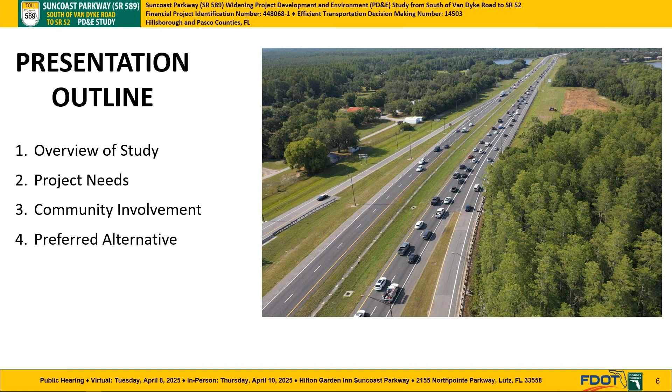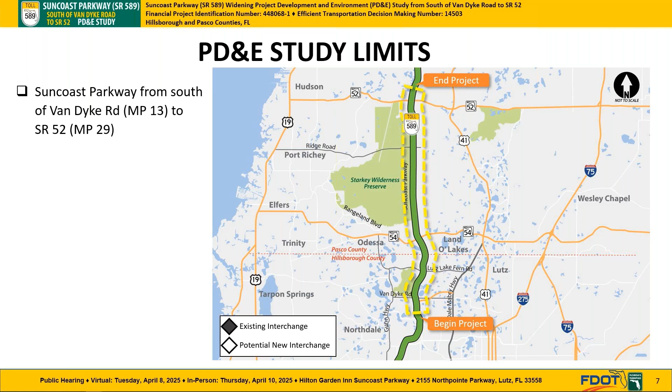The remainder of this presentation will provide an overview of the study, project needs, and our community involvement efforts. We will then review the preferred alternative and potential environmental effects, both beneficial and adverse. The study limits extend along the Suncoast Parkway from south of Van Dyke Road at milepost 13 to State Road 52 at milepost 29. The project is located within both Hillsborough and Pasco counties. There are 5 existing interchanges within the study limits. Pasco County is currently evaluating extending Rangeland Boulevard across the Suncoast Parkway. This PD&E study also includes evaluating one potential new interchange at Rangeland Boulevard, as requested by Pasco County.

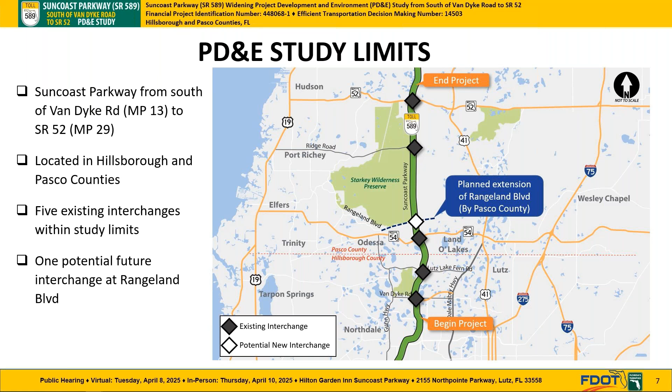The purpose and need for a project provides a basis for developing, considering, evaluating, and eliminating project alternatives. The project purpose and need are to accommodate year 2050 travel demands, enhance safety, improve travel time reliability, and enhance emergency response and evacuation.

In 2000, the population within Hillsborough and Pasco counties was just over 1 million people, and it more than doubled by 2023. The population within the 2 counties is forecasted to be over 2.8 million people by the year 2050. With the project located within a rapidly growing region, travel demands on the Suncoast Parkway are expected to increase by 70%. If nothing is done, the existing roadways in the study area would not be able to accommodate the expected increase in traffic.

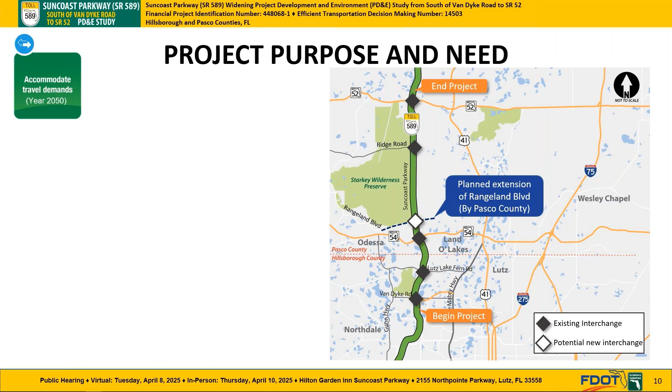Improvements to the Suncoast Parkway are needed to accommodate year 2050 travel demands. In order to accommodate this demand, 6 lanes are needed now from south of Van Dyke Road to north of State Road 54, and 8 lanes will be needed by 2040. From north of State Road 54 to Ridge Road, 6 lanes will be needed by 2030. From Ridge Road to State Road 52, 6 lanes will be needed by 2035.

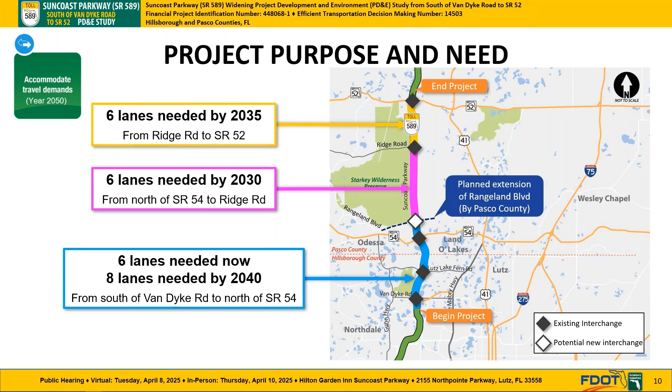Improvements to the Suncoast Parkway are needed to enhance safety. Between 2018 and 2022, there were approximately 1,045 crashes within the study limits, equating to an economic cost of $145 million. If nothing is done, increased congestion will lead to an increase in crashes.

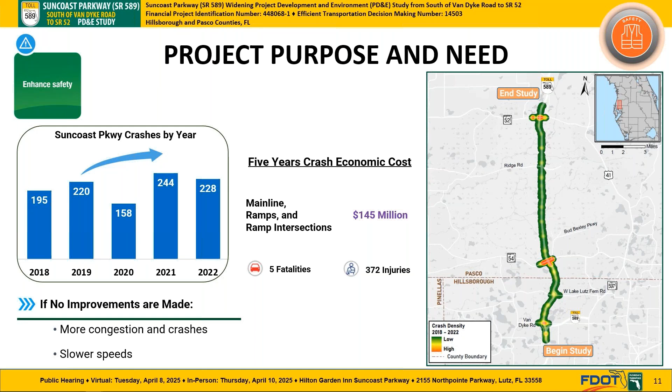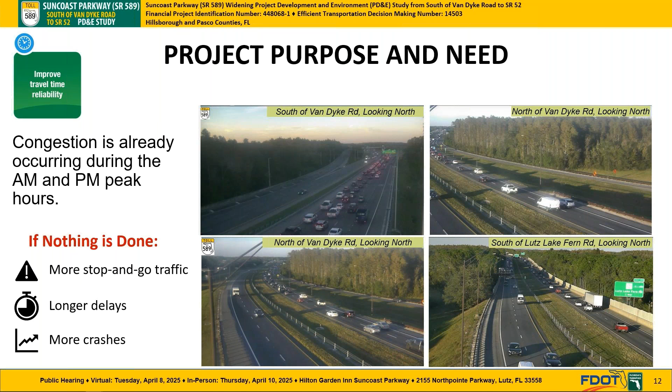Improvements to the Suncoast Parkway are needed to improve travel time reliability. Currently, there is congestion during the morning and afternoon rush hours along the Suncoast Parkway and at the State Road 54 interchange. The proposed improvements are expected to reduce travel times during peak periods. Finally, improvements are also needed to efficiently process large volumes of traffic during emergency evacuation events.

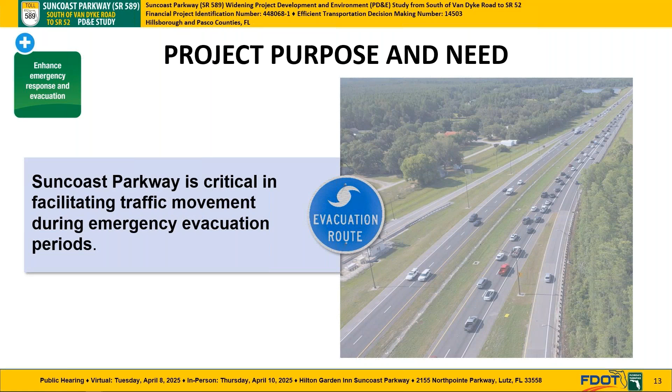Serving communities is at the center of everything the Florida Department of Transportation does. During the development of this project, the enterprise has engaged adjacent communities and stakeholders in the project's decision-making process. In February of 2024, over 2,400 newsletters announcing the start of the study were distributed to residents, property owners, and interested parties. An alternatives public information meeting was then held in June of 2024, where project alternatives were presented. Approximately 100 people attended the alternatives public information meeting, and over 40 written comments were provided to the project team.

Community feedback is at the core of all we do. The Florida Department of Transportation works with the public to balance their community vision with the community's transportation needs. This is routine on all of our projects to ensure Florida's infrastructure is safe, resilient, and efficient for many years into the future. This includes coordination with local governments and agencies to receive input that was incorporated into the preferred project alternative.

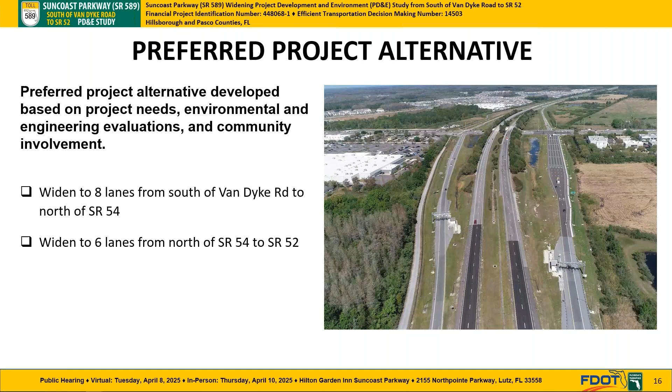A preferred project alternative has been developed based on the project needs, environmental and engineering evaluations, and community involvement. The preferred project alternative would widen the Suncoast Parkway to 8 lanes from south of Van Dyke Road to north of State Road 54, widen the Suncoast Parkway to 6 lanes from north of State Road 54 to State Road 52, improve existing interchanges, and accommodate a future interchange at Rangeland Boulevard.

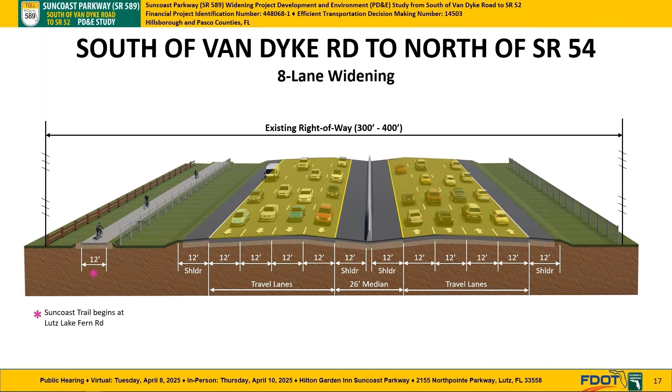From south of Van Dyke Road to north of State Road 54, widening to the inside and outside is proposed to include 4 12-foot wide travel lanes in each direction, separated by a 26-foot wide median with a barrier wall. From north of State Road 54 to State Road 52, widening to the inside is proposed to provide 3 12-foot wide travel lanes in each direction, separated by a 40-foot wide median.

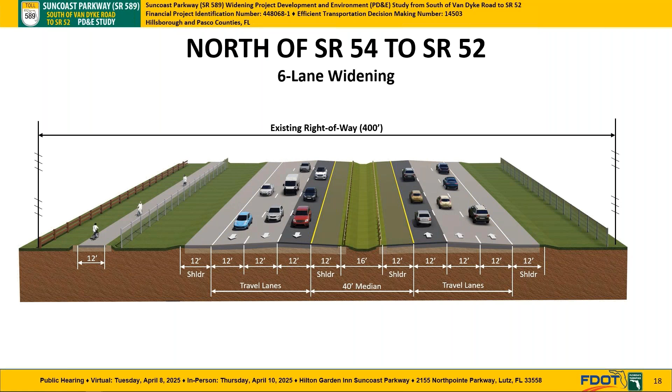Now we will cover the details of the preferred alternative related to the 5 existing interchange locations. After, we will discuss the ongoing planning efforts around a potential new interchange at the future Rangeland Boulevard.

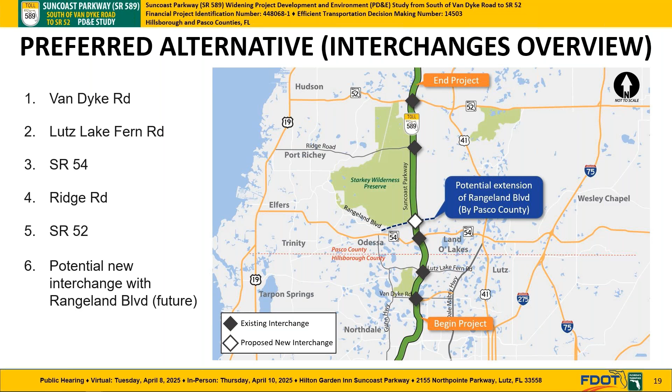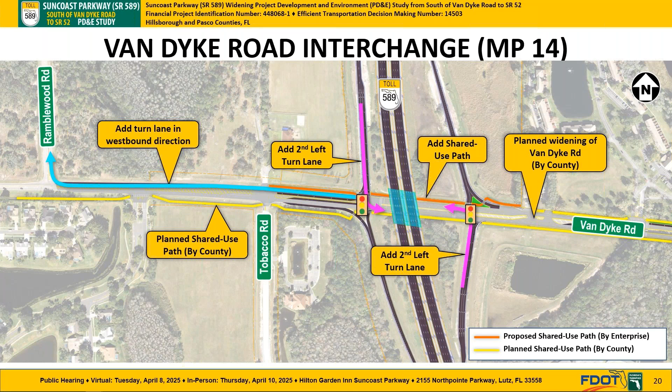At the Lutz Lake Fern Road interchange, the preferred alternative consists of minor modifications that includes adding additional turn lanes and extending turn lanes at the intersections. In addition, a shared use path is proposed within the interchange area on both sides of Lutz Lake Fern Road.

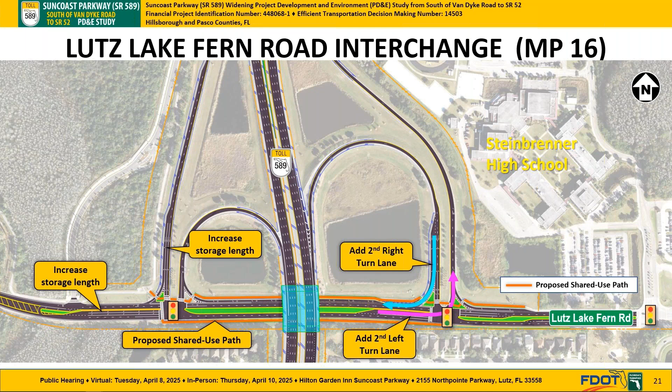At the State Road 54 interchange, the preferred alternative includes adding an additional right turn lane to the northbound off-ramp, an additional right and left turn lane to the southbound off-ramp, and an additional left turn lane from westbound State Road 54 to the southbound on-ramp. Along State Road 54 itself, an additional through lane would be added in the westbound direction beginning at the southbound off-ramp, continuing past Crossings Boulevard and up to South Branch Boulevard. Improvements would also include a shared use path on both sides within the interchange area.

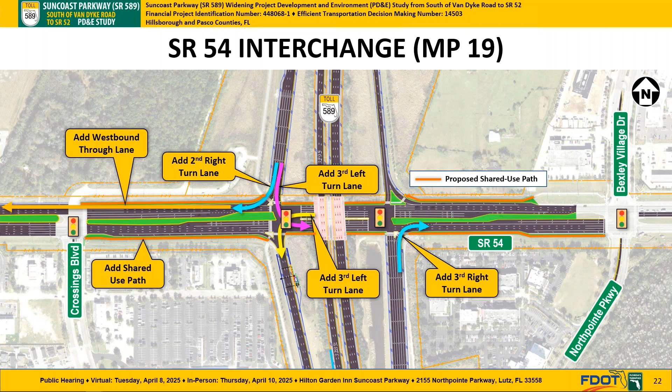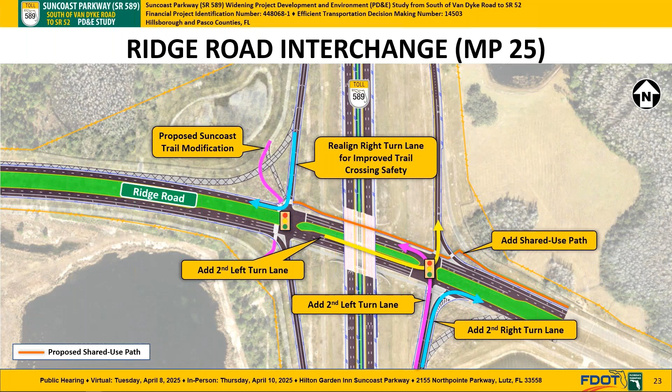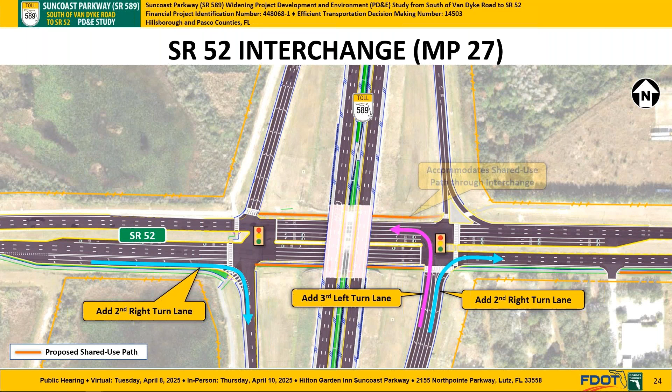We will now discuss the ongoing planning and development of a potential new interchange with the future extension of Rangeland Boulevard. When considering any new interchange connection, Florida's Turnpike Enterprise adheres to the following criteria.

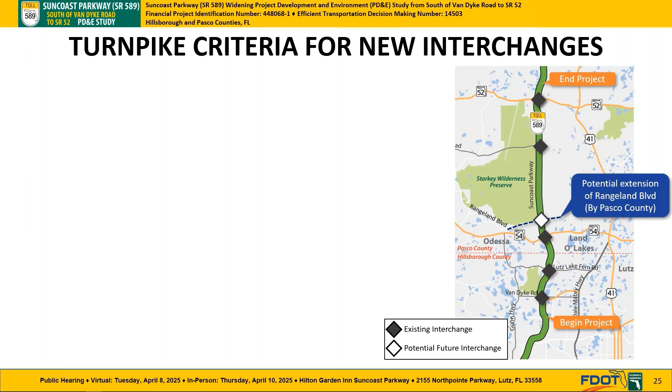A new interchange must connect to a public roadway and serve all movements. The interchange must meet safety and operational requirements. The interchange must be supported by the local community. We place a high priority on projects that are welcomed within the communities we serve. And finally, the interchange must be consistent with local government plans and priorities.

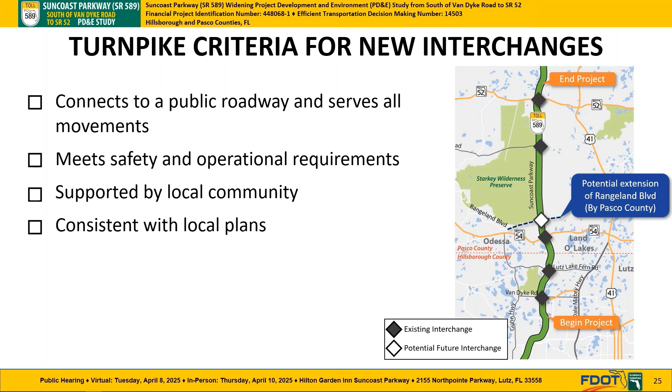The preferred alternative includes adding a new interchange at Rangeland Boulevard. However, a new interchange would not be constructed until all criteria are met and funding has been identified. We will now review the interchange concept developed for Rangeland Boulevard.

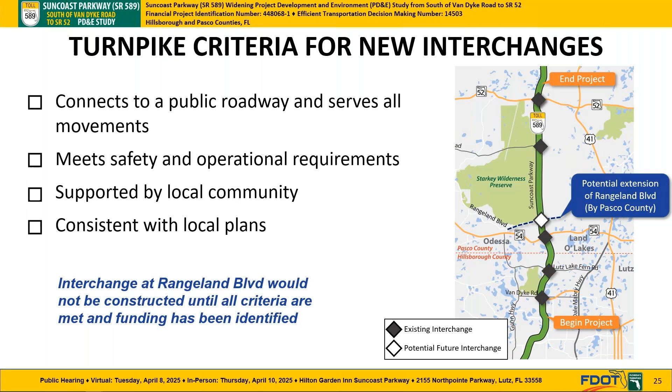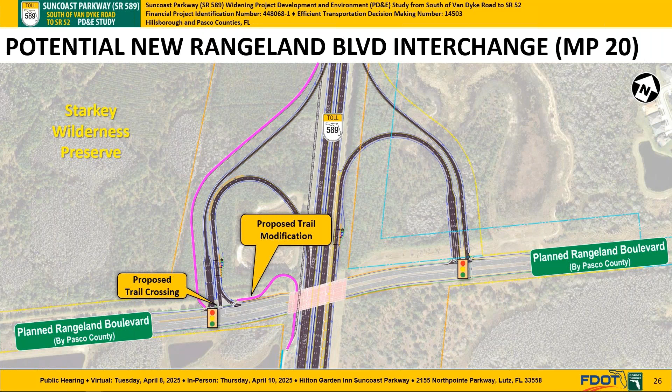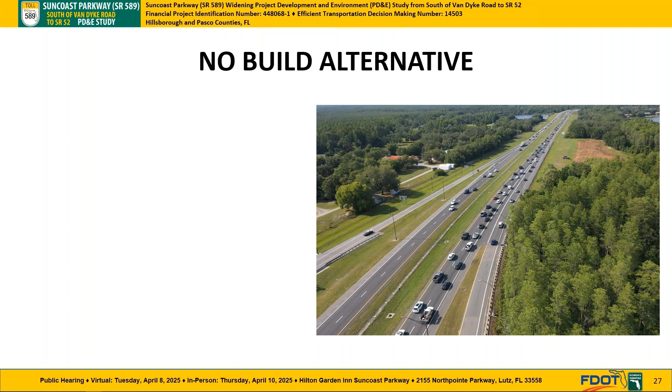As part of every PD&E study, the no-build or no-action alternative is considered. The no-build alternative describes the conditions that will occur if the mainline widening or interchange improvements are not built. Advantages include no impacts to the social, physical, or natural environment, and no additional right-of-way or construction cost. Disadvantages include increased congestion and safety issues, slower emergency evacuation and response times, and future growth in the region would not be accommodated. Selection of the no-build alternative would not meet the project's purpose and need.

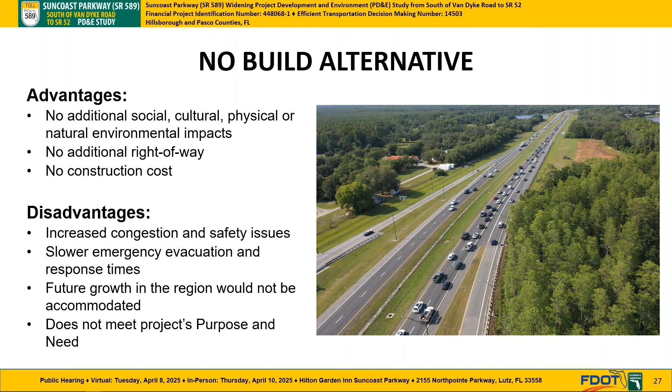When comparing the no-build alternative versus the build alternative, the build alternative eliminates mainline backups, reducing Suncoast travel time by 17% between Van Dyke Road and State Road 52. With the project access enhancements, signal delay within the study area decreases by 43%. The build alternative also reduces congestion on local roads, such as State Road 54.

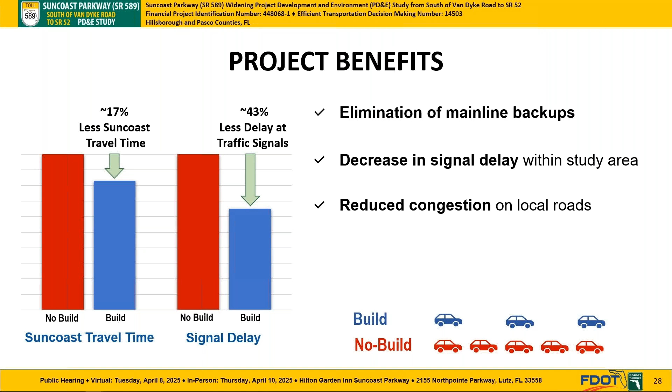The build alternative will reduce future crashes, which result in a potential savings of $36.2 million over 20 years. Quality of life will also be improved, with reduced congestion and commuting time, improved air quality and accessibility, and reduced noise pollution with the addition of noise walls.

We encourage you to visit the project website to view detailed exhibits of the proposed improvements.

As part of the study, the enterprise evaluated the potential social, natural, physical, and cultural effects of the proposed project. The features listed are just some of the types of analysis included in this PD&E study. Avoidance or minimization of impacts to these features is a key consideration. Impacts that cannot be avoided will be mitigated.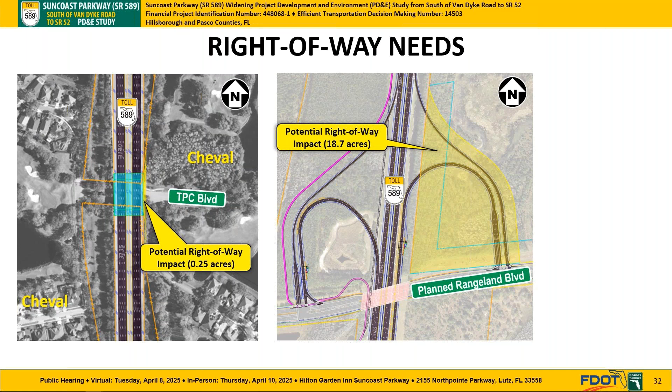There are two areas of the project with a potential need for right-of-way or additional land. The first is a quarter-acre sliver of land adjacent to the bridge over TPC Boulevard, and the second is 18.7 acres of land in the northeast quadrant of the proposed Rangeland Boulevard interchange. Please refer to the display boards for more details. The right-of-way needs for this project will not result in any business or residential relocations.

A cultural resources assessment survey was conducted for this PD&E study to identify any cultural resources and assess their eligibility for listing in the National Register of Historic Places. No archaeological sites eligible for listing on the National Register of Historic Places were identified. 4 historical resources were identified, but determined not to be eligible for listing on the National Register of Historic Places. No significant impacts are anticipated as a result of this project.

Federal protected species may be present or utilize areas within the proposed project. The project may affect, but is not likely to adversely affect, the eastern indigo snake, Florida scrub jay, and wood stork. Florida's Turnpike Enterprise will request technical assistance with the United States Fish and Wildlife Service, USFWS, on the project during the permitting and design phase regarding the regulations for these protected species and mitigation measures.

State protected species may be present or utilize areas within the proposed project, but no adverse impacts are anticipated. Florida's Turnpike Enterprise will continue coordinating with the Florida Fish and Wildlife Conservation Commission regarding these species.

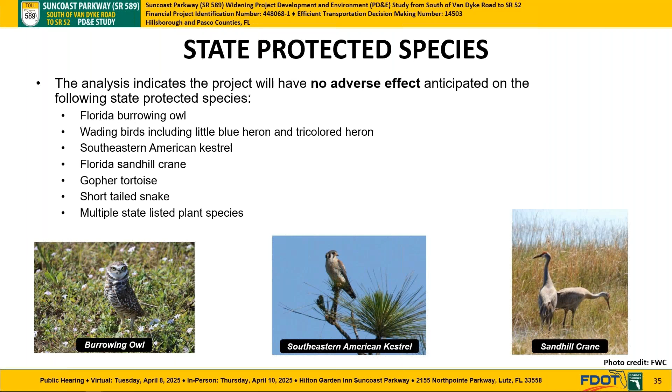There are 6 existing wildlife crossings within the study limits. All existing wildlife crossings will be maintained, and opportunities to enhance will be considered during the design phase.

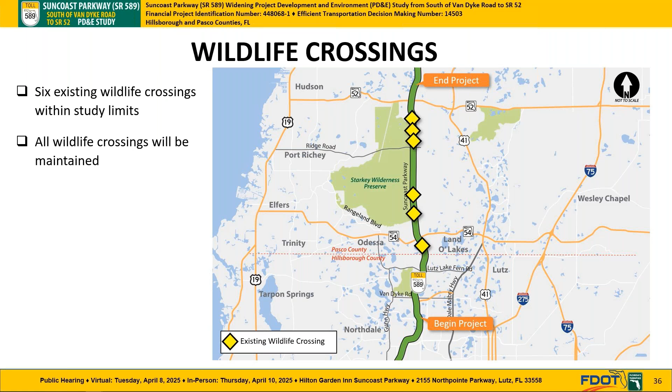The proposed roadway and stormwater pond improvements will potentially affect an estimated 6.15 acres of wetlands and 0.6 acres of surface waters. Florida's Turnpike Enterprise will mitigate wetland and surface water impacts resulting from this project's construction to meet state and federal requirements. Final pond site locations will be determined in the design phase.

A location hydraulics report was prepared for the project to identify potential 100-year floodplain encroachments resulting from the proposed improvements. Floodplain impacts will be fully compensated for, and there will be no net increases to floodplain stages as a result of this project.

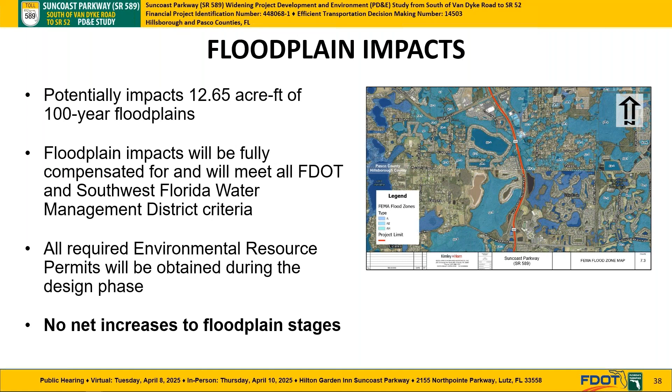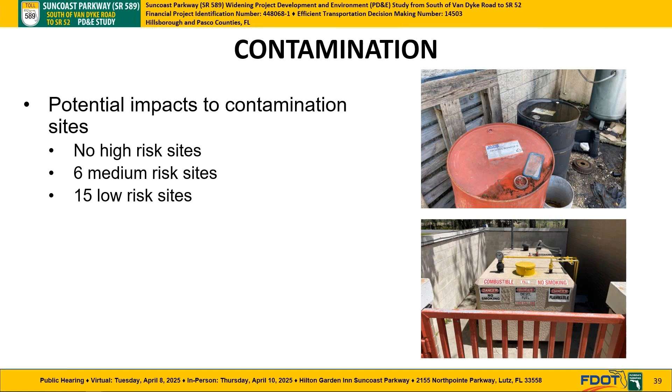A contamination screening evaluation report was prepared for this project to identify contamination concerns within the study area. The results identified no high-risk sites, 6 medium-risk sites, 15 low-risk sites, and 2 no-risk sites for the roadway and stormwater pond improvements. These sites will be further evaluated during the design phase to identify options to avoid, minimize, or mitigate contamination involvement.

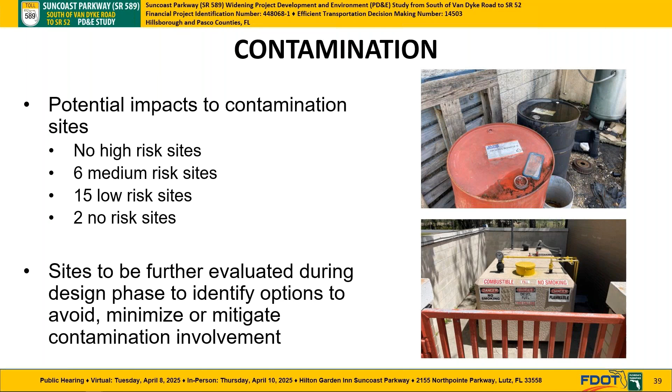A noise study report was prepared for this project. Impacted locations throughout the corridor were found to be potentially feasible and reasonable for noise walls. These locations are proposed for future study during design and can be seen in the noise study report prepared for this project. For more detailed information on the proposed improvements, including potential noise wall locations, visit the display boards located on the project website and at the in-person hearing, where a noise specialist will be available to answer your questions.

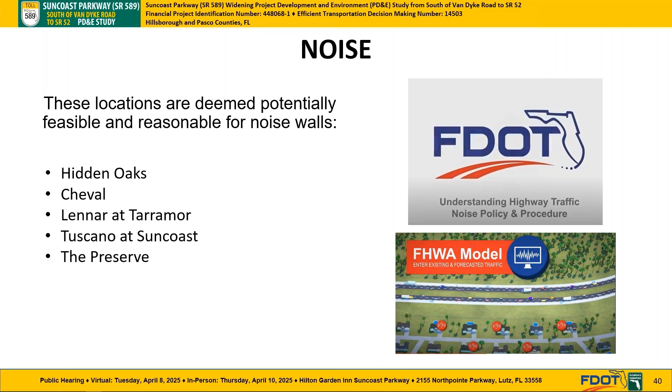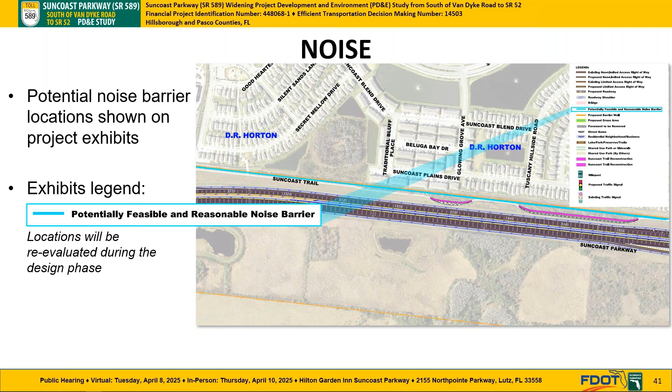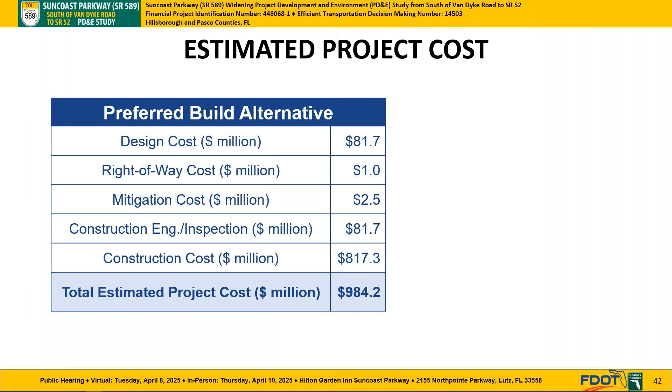The total project cost for the preferred alternative is estimated at approximately $984.2 million in present-day costs. All project-related costs are included in this total estimate. Pending completion of this PD&E study, the design phase for portions of the proposed project is funded. There is currently no funding for right-of-way or construction.

The evaluation matrix compares the preferred project alternative to the no-build alternative and is on display and available for review.

We continue to encourage public input to help us make this important decision. You can submit written comments at the project website, www.suncoastparkwaypde.com, or you can mail or email your comments directly to the project manager, Greg Moore. During the in-person hearing, you can also submit your written comments using the comment forms provided. Written comments must be received no later than April 24, 2025, to become part of the public hearing record.

The next step is to incorporate your input on this public hearing into our decision-making process. After the comment period closes and your input has been considered, a decision will be made, and the final PD&E document will be approved. This project has and will continue to comply with all applicable state and federal rules and regulations.